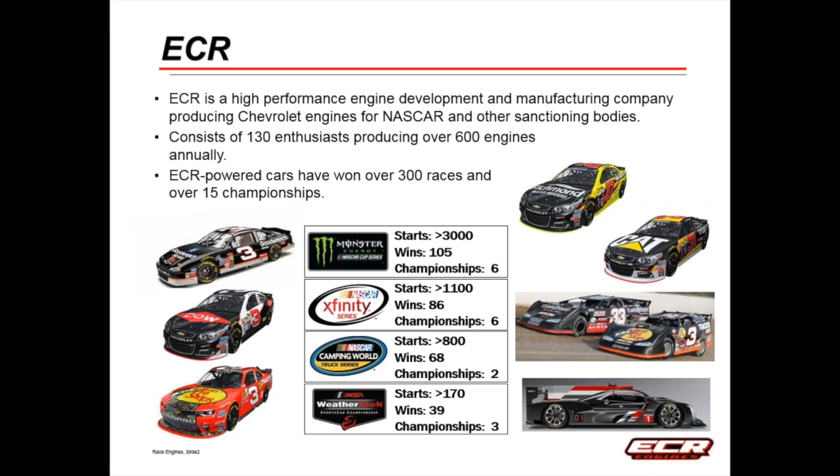Been doing this for a long time. Those of you who have been around for a while, which isn't very many of you, our claim to fame up in RCR was back in Dale Earnhardt's days and bringing him through his years of success in NASCAR. And since then, we've had the pleasure and honor of working with many other drivers.

So most of what we're going to talk about today, engine-wise, is information that comes from a Cup engine. A NASCAR Cup engine has its roots many, many years ago, back actually to the small block engines of the 1960s. These are V8 engines that are 350 to 358 cubic inches, which is 5.8 liters. I put the word stock in parentheses because presumably by rules, the engine is a stock cast iron block and aluminum cylinder heads.

But we have done this exercise a number of times over the years where we look over the parts list for our engines, which consists now of over 4,000 parts if you count all bolts and washers, hoping to see if we had one part that actually would qualify as stock, and so far we haven't been able to find one. So there are no parts on these engines that are actually parts that are on automotive engines that you would buy at a dealer.

Nevertheless, the architecture as far as the displacement and the bore spacing and things like that are representative. Compression ratio is limited in the rules. It's a fairly archaic architecture. I don't know, how many of you are engine people in the room or kind of know engines? Okay, well, this is good. Okay, so I'm not speaking in a foreign language up here on a lot of this. A push rod 2-valve per cylinder valve train, that's a pretty old archaic architecture.

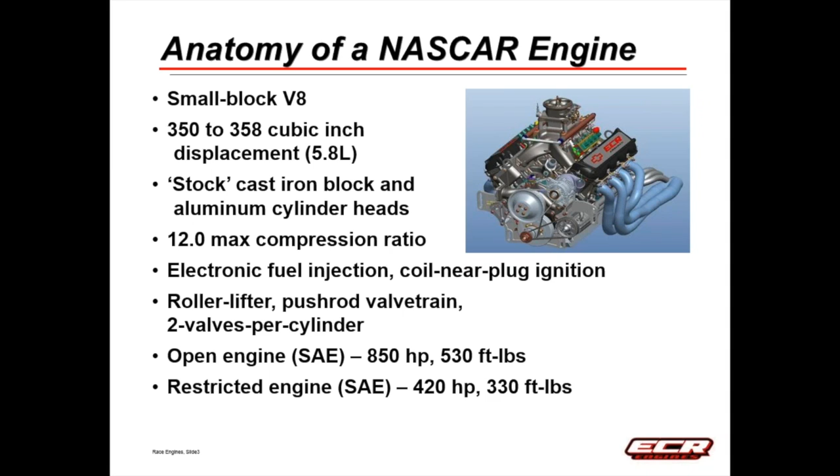Restricted engines for super speedways, that's one of the more restricted venues that NASCAR puts on us. They put an air restricting device where the air has to pass through 4 holes that are basically about the size of your little finger, and that reduces the power down to only around 420 horsepower. That's for super speedways like Daytona and Talladega, where even at that power level, average speed over a lap will still exceed 200 miles an hour. If we were to go there with the unrestricted engines, average speeds would exceed 240 miles an hour, and at some point it just gets a little ridiculous and a little dangerous. So they try to keep the speeds closer to 200 miles an hour.

So what in the world is the difference between a race engine and a production engine? I said architecturally they're similar, but the development philosophy that you use to create them is much different. In the production engine world, there are a number of criteria that you have to work around, all of which are weighted similarly. Obviously, the engine has to last, in the course of a production engine, has to last 150,000, 200,000 miles. It has to make the power you want. Fuel economy is always a concern. Drivability, noise. You have to worry about emission standards. It has to fit in the car.

You have to be able to afford it. You have to be able to make it. A production LT1 engine, which mimics what our engines are as far as bore sizes and displacement, makes around 460 horsepower and 465 foot-pounds.

In racing, we have a different set of requirements. Number one is reliability and durability, because of course you have to finish if you want to win. But our reliability or durability target is race distance plus 1 mile. So in the case of a 500-mile race at Charlotte, our goal would be to produce something that lasts for 501 miles. If it lasts for 510 miles, you've probably over-designed some components and are giving up some power. If it lasts for 490, you had a very bad miscalculation, and need to work a little harder next time.

Power curve, of course, is of ultimate importance. Fuel economy, don't worry about it so much, we'll figure out a way to make it fit. These engines cost a fortune and take forever to make. So the criteria gets less and less stringent with race engines once you get past the requirement that it has to last for race distance plus 1 mile and make a lot of power.

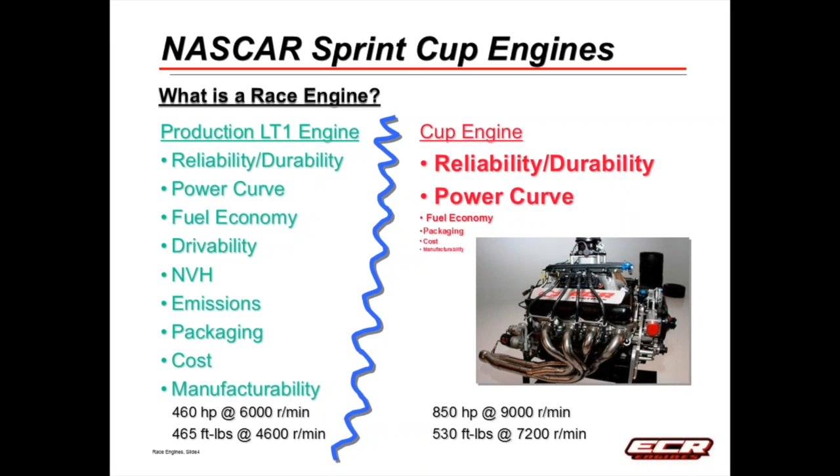In order to do that, these engines are stressed pretty heavily. They're highly stressed to produce the output they do, and to produce that output it's highly dependent on favorable fuel and lubricant properties. Now let me show you a little video here.

This is one thing that I wasn't sure how to do remotely, so we'll try it this way. Well, that didn't work either. Let's try it this way.

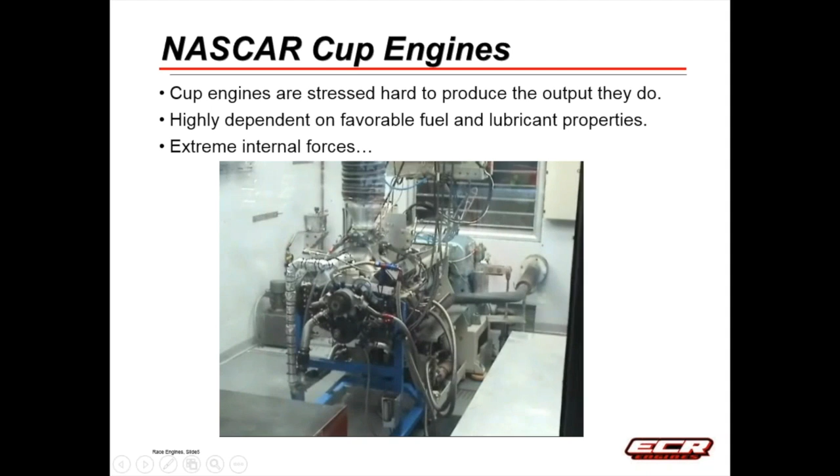We're at 333 degrees cooling out, 116 psi in the block, and 105 in the tank. Whoa! Okay, so that one didn't make it to race distance plus 1 mile. But that illustrates for you the amount of force that's in these engines and what's going on when they run. When they don't make it, the results can be pretty spectacular and depressing if it's your engine.

For fuel history of NASCAR, for many years NASCAR spec fuel was a leaded aviation fuel, 112 octane. This went all the way up to 2008, long after leaded fuel was gone from the automotive world. The reason we retained it in NASCAR was we just needed the octane, and lead was an excellent source of octane. But it was always a little scary because we're intimately in contact with the fuel all the time. We're breathing it, getting it all over our skin, wearing it, swimming in it. Knowing that we were working with something that is a known blood toxin poison wasn't that comforting.

So it was nice in 2008 when NASCAR finally adopted an unleaded fuel. However, in order to get the octane we required, we had to use over 40% aromatic concentration in the fuel. Aromatics are benzenes, toluenes, and most of the aromatic constituents are known carcinogens. So what we did was just change the way we were going to die, from lead poisoning to cancer. Still not comforting, but we did with it what we could.

Then in 2011, NASCAR changed to an E15 fuel. The nice thing about that is ethanol inherently has a very high octane, something we'll talk about later. That allowed us to displace over half of the aromatics in the fuel with ethanol, a much safer additive, and that's what we've been racing ever since. E15 is 15% ethanol. If we could increase the ethanol concentration to 30%, we would be able to eliminate the aromatics altogether, which is certainly something I hope happens in the not too distant future.

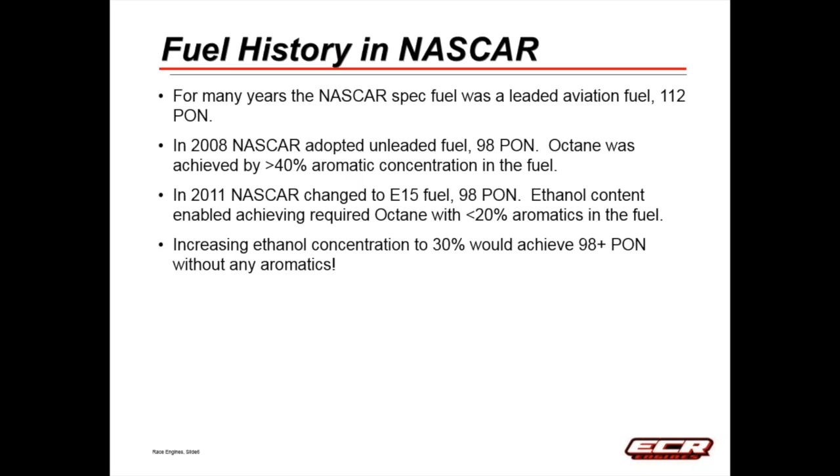So what really is an engine? An engine is simply an energy conversion device. You're taking fuel, the chemical energy in fuel, and passing it through this energy conversion device that translates that to mechanical energy at the wheels which propel your vehicle.

In the case of a NASCAR engine, we put about 2,430 horsepower into the engine in the form of chemical energy. We pass it through this energy conversion device where we have thermal efficiency, volumetric efficiency, and mechanical efficiency associated, and we get about 850 horsepower out the other end. This horse here is looking concerned and a little confused because he expected a lot more than 850 of his friends when he considered that he put 2,430 in. But that's actually pretty good efficiency for an internal combustion spark ignition engine. That's what we're dealing with, and it's depressing on the surface to know that we're that inefficient in transferring chemical energy to mechanical energy.

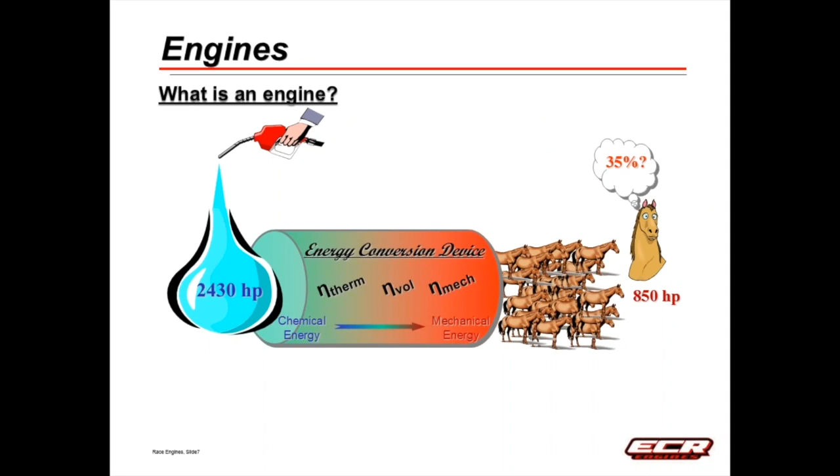On the bright side, that means there's plenty of room for innovation. Hopefully someday many of you in this room will contribute to making it so that to get this amount of power out, you put less in, or if you put this much in, you get significantly more power out.

Now let's concentrate more on the fuel, because that's the input to this whole process, what drives these engines. I know many of you know engines and chemistry, so a lot of this may be rudimentary.

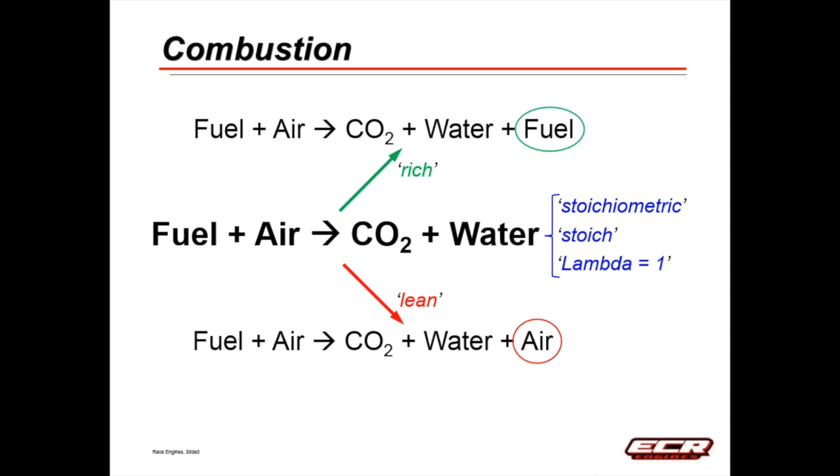Let's look at the difference between ethanol and gasoline. Ethanol, shown on top, has just two carbon atoms with a hydroxyl radical attached. This is a stoichiometric reaction, and these ratios are very important. Every ratio here is favorable from a combustion or environmental perspective relative to gasoline. Ethanol's hydrogen-carbon ratio has three times more hydrogen atoms than carbon atoms, and its oxygen-carbon ratio is a half. The research octane number of ethanol is around 109.

The heat of vaporization of ethanol is around 110 kilojoules per kilogram of air. We'll go over each of these individually in a minute. Comparing to gasoline, the hydrogen-carbon ratio is around 1.8, there is no oxygen attached to gasoline, the octane number is around 93, and the heat of vaporization is about 40.

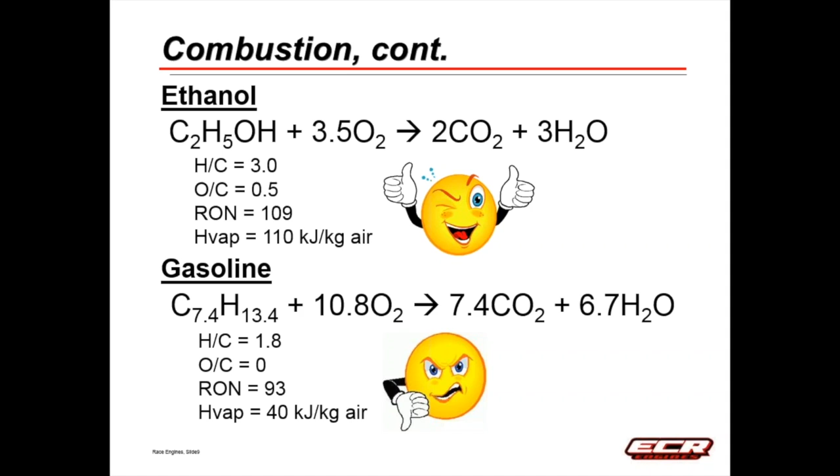Now I want to go through each of these parameters individually and explain how ethanol and gasoline differ, and how those differences generally work in your favor. The first is the hydrogen-to-carbon and oxygen-to-carbon ratios. The more hydrogen you have relative to carbon, the cleaner it burns—hydrogen burns very cleanly, and the products of combustion of hydrogen and oxygen are water, which is a pretty clean reaction.

Having some oxygen bound to the fuel—this relates to the oxygen-to-carbon ratio—increases the oxidation efficiency. So when you blend gasoline with ethanol, that reduces carbon monoxide and unburned hydrocarbon emissions, because you have that oxygen atom that's part of the fuel.

Let's burn a couple of things so you get a vivid description of what I'm talking about. What I have here is Sunoco gasoline—actually premium gasoline without any ethanol in it. I'll pour a little bit on here, hopefully not spilling it on the floor... spilled some on the table. The object is not to burn the building down.

So there's how gasoline burns. You can see the carbon coming up. If I hold this right over here for a bit, you can see the carbon emissions coming off the combustion. What's happening is carbon that's not finding oxygen is being emitted as soot. There's no oxygen in the fuel, so this is purely a diffusion flame, where the fuel has to evaporate and meet with air coming down from the environment. Let's put this one out.

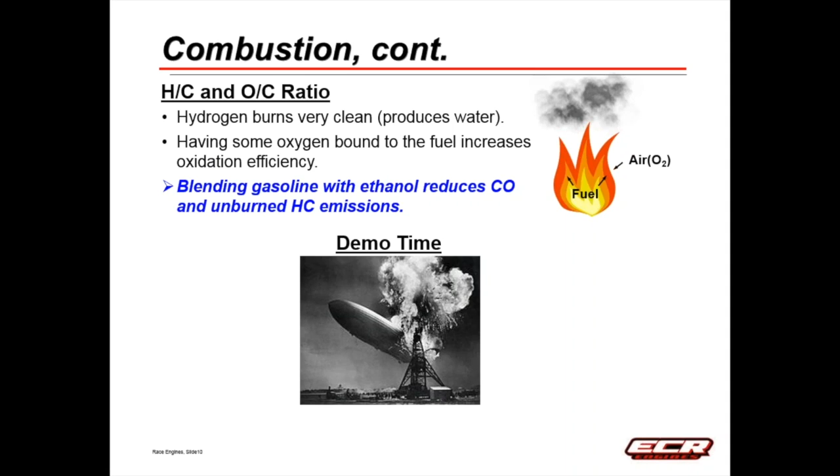Okay, so let's move on to the next property. I'm going to spend a little bit of time talking about this one. This is the octane difference between ethanol and gasoline. As we mentioned before, in the slide where we compared the chemistry of the two, remember the research octane number of ethanol was around 109 and gasoline was around 93 or so.

Knock refers to the sound that results from spontaneous ignition of the air-fuel mixture ahead of the normal propagating flame, and the subsequent cylinder pressure oscillations that occur. Knock typically occurs near the end of the combustion event and is characterized by rapid fluctuations in cylinder pressure and a distinctive pinging sound. Now you don't hear that too much on modern cars anymore because they have accelerometers mounted on the side of the engine.

Once they start to knock, it starts retarding the spark and makes calibration changes so that you don't hear it anymore, but you're degrading the efficiency in order to keep it from doing that. Power can actually increase with knock because the end of the air-fuel mixture burns nearer to TDC.

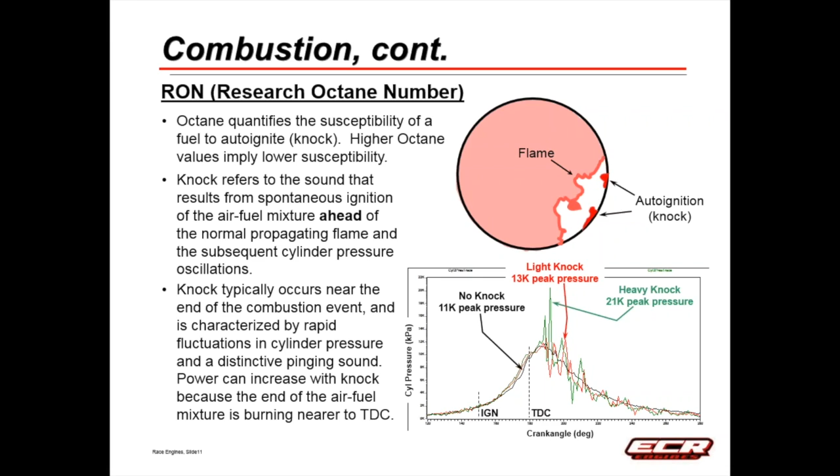The green curve has very heavy knock. You can see it ringing, and the initial knock pressure peak here is almost double the peak pressure of what the engine was generating without the knock. Too much of that and you will be walking very soon, because that's generating pressures and temperatures which are not what the engine was designed to handle.

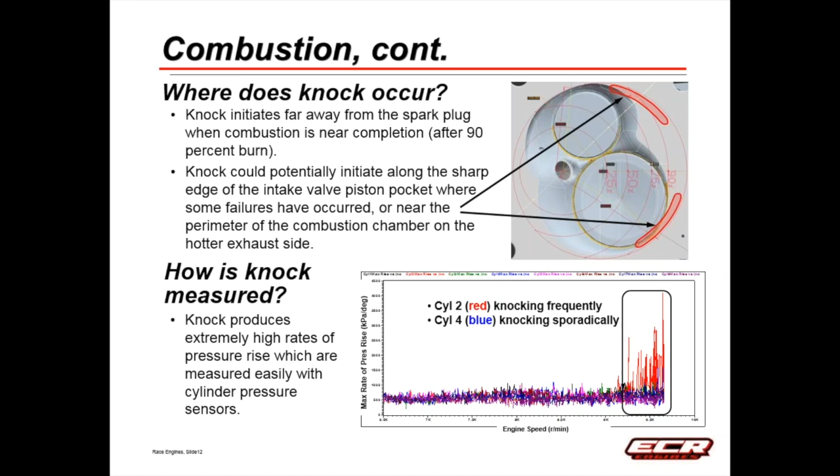Knock is measured by a cylinder pressure sensor looking at rates of pressure rise. When knock happens, the pressure rises very, very quickly. So this is looking at rate of pressure rise versus engine speed in a sweep, going from 6,500 RPM up to 10,000 RPM, with all 8 cylinders of the engine plotted. You see the red here, which is cylinder 2, with rates of pressure rise going from 500 to several thousand, indicating that we have extreme knock going on in that case.

When you take apart an engine that's knocked or that's failed and you wonder if knock had anything to do with it, normally the telltale signs are you'll see on the edge of the piston, far away from the spark plug, you'll see actually some material pitted out on the edges.

Now, when does knock occur? Well, knock occurs when the integral of temperature times time of the air-fuel mixture is high. So that's why it's the part farthest away from the spark, because that's the last part that gets burned, so that's the time. The temperature part is if you're at a high load, if your compression ratio is high, you have things here that encourage knock.

High compression ratio, low engine speed. That means you have more physical time from when the spark is discharged. Temperatures are high. Charge dilution is low. Air is dry and dense, so you don't have moisture. A lot of deposits, high amount of spark advance. Compression ratio high. This is the big one.

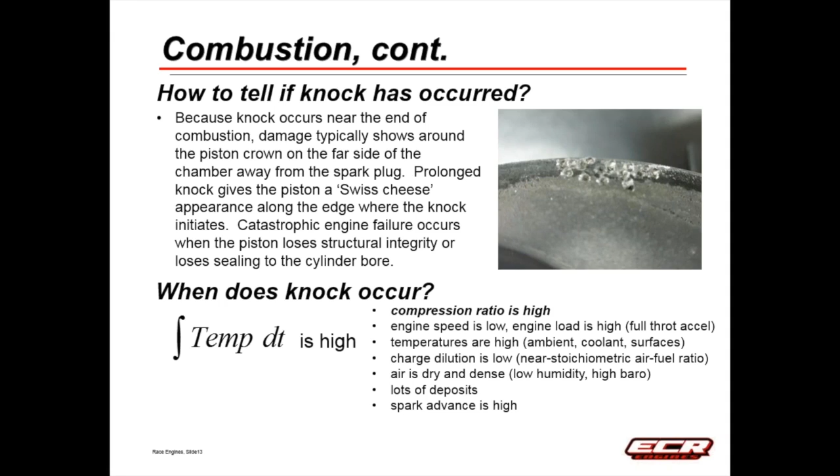Those of you who have been through engine courses, I'm sure one of the first things you learn is engine efficiency, at least ideally, is directly proportional to compression ratio. If you want to get better fuel economy, one of the first things you need to do is increase the compression ratio of your engine. So here's a formula for ideal.

At 10 to 1 compression ratio, you get about 50% efficiency from this equation. At 13 to 1, you get about 54% efficiency. You say, well, that's only 4 points. Well, you take the ratio of the two, and it's closer to 10% gain in thermal efficiency, which is a strong gain. So therefore, octane limits the efficiency potential of engines through the ability to implement a high compression ratio.

Ethanol is the safest, least expensive octane booster. We said before, if you could have 109 octane fuel, you could have extremely high compression ratio in engines and knock would not be an issue.

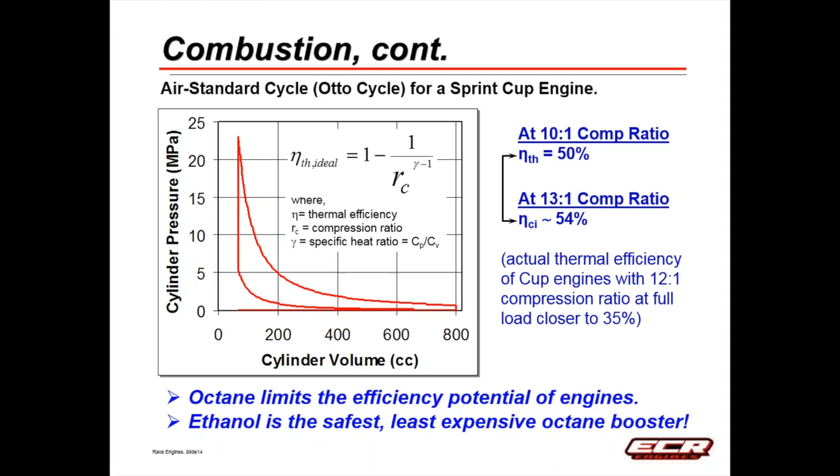Next, I want to talk a little bit about heat of vaporization. Heat of vaporization is the amount of energy required to convert a substance from liquid to gaseous phase. I better cover this up before it all evaporates away. If you take some of this and pour it on the back of your hand, and then blow on the back of your hand, when it vaporizes, you'll feel your hand get very, very cool. That's the heat of vaporization at work there.

And the heat of vaporization of ethanol is almost 3 times the heat of vaporization of gasoline. Fuel vaporization is beneficial in engines because it cools the incoming charge, analogous to running on a much colder day. So the more ethanol that you inject into the mixture, as it evaporates, it cools the air and fuel mixture coming in. And once again, that's going to help you from an efficiency standpoint, and it's also going to help you from a knock or compression ratio standpoint because you're starting with a cooler mixture.

So like I said, ethanol has nearly 3 times the heat of vaporization of gasoline, providing greater cooling and enhancing the already excellent octane characteristics. Octane ratings are done at a fixed inlet charge temperature. So when fuels are rated, the rating process that the government uses a fixed temperature of the air-fuel mixture going in, so therefore you don't get to take advantage of the characteristics of ethanol in that octane rating.

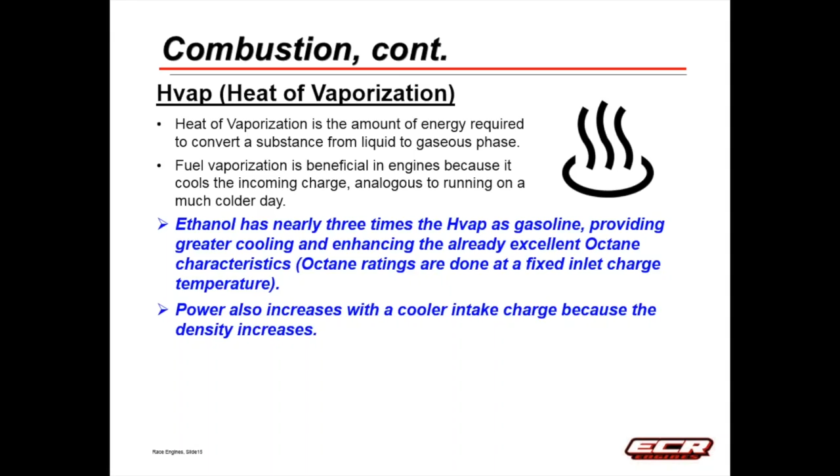Power also increases with a cooler intake charge because the density increases. If you want your car to go faster and have more fun, then you want to get out on a nice, cool, dry day. So summarizing ethanol combustion, high hydrogen content and entrained oxygen reduce unburned hydrocarbon and partially oxidized carbon emissions relative to gasoline. Once again, that's the hydrogen and the oxygen.

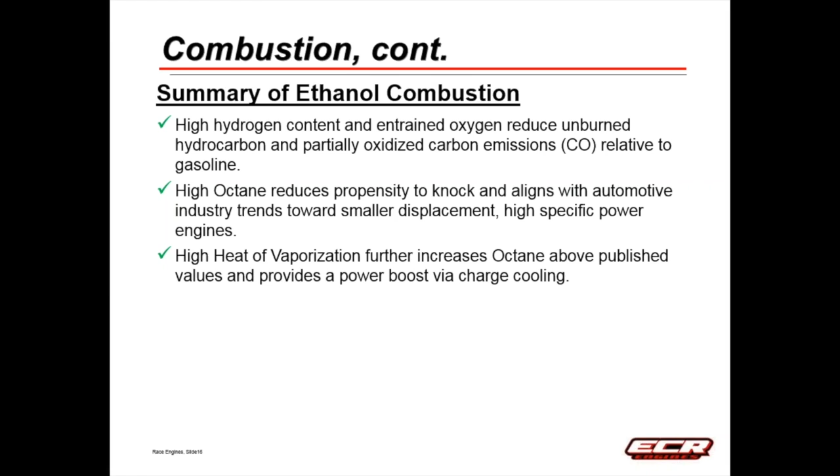High octane reduces propensity to knock and aligns with automotive industry trends towards smaller displacement, high specific power engines. You see V8s going away, being replaced by V6s that are twin turbocharged or boosted in some way. In order to accommodate those high specific power engines, that's where you need the octane. High heat of vaporization further increases octane above published values and provides a power boost via charge cooling. So those are all nice benefits, good advantages.

You will often hear disadvantages of ethanol as well. So let's go ahead and review those and see what's real and what's imaginary. What we're going to talk about are the heating value of ethanol relative to gasoline, corporate average fuel economy standards and what it requires to meet those, the hygroscopic nature of ethanol, and finally the stoichiometry of ethanol versus gasoline and how that applies to boats and lawnmowers and weed whackers and things like that.

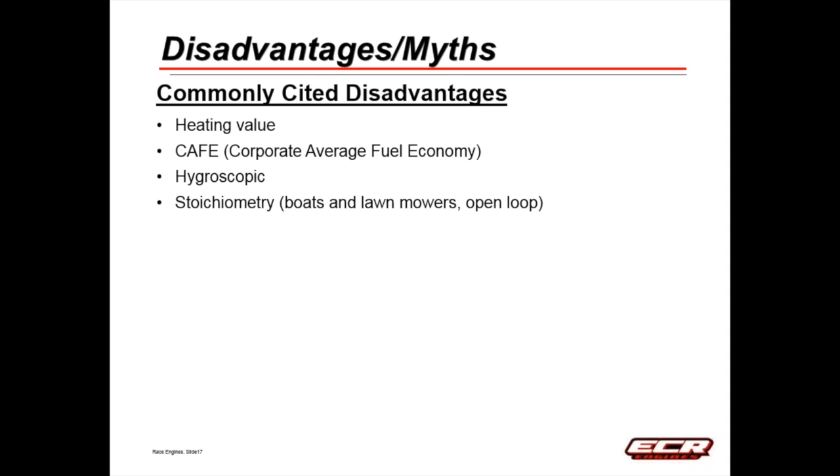So let's start talking first with heating value. Lower heating value of gasoline is about 116,000 BTUs per gallon. I know nobody uses BTUs anymore, but NASCAR still uses BTUs. So lower heating value of ethanol is about 76,000 BTUs per gallon. It's 34% less energy in a gallon of ethanol than there is in gasoline.

So all else being equal, pure ethanol would produce 34% less fuel economy than pure gasoline because of the heating value reduction. That is if you were running on pure ethanol versus pure gasoline. Sometimes you'll hear people say, oh, well, I don't want ethanol in my fuel because ethanol is 30% worse fuel mileage. Well, if it was pure ethanol, that would be true. However, E10 is what's commonly available in the pumps, so that's 10% ethanol. So now instead of 34%, you're talking about 3.4%.

At E15, you're talking about a 5.1% energy reduction using an E15 gasoline blend as opposed to pure gasoline. So typical E10 gasoline does have about 3.4% less energy content than ethanol-free gasoline. However, E10 gasoline costs 20 to 40% less than ethanol-free gasoline. E15 gasoline costs yet another 3 to 5% less than E10 gasoline.

So if I'm going in there and I have the opportunity to buy E10 or E15, which a number of stations in North Carolina do, if I can save 3 to 5% in costs for a 1.7% delta in energy, once again, what I'm listening to is my wallet, and my wallet says that's the right thing to do. Ethanol blended gasoline is a bargain on a miles per dollar basis.

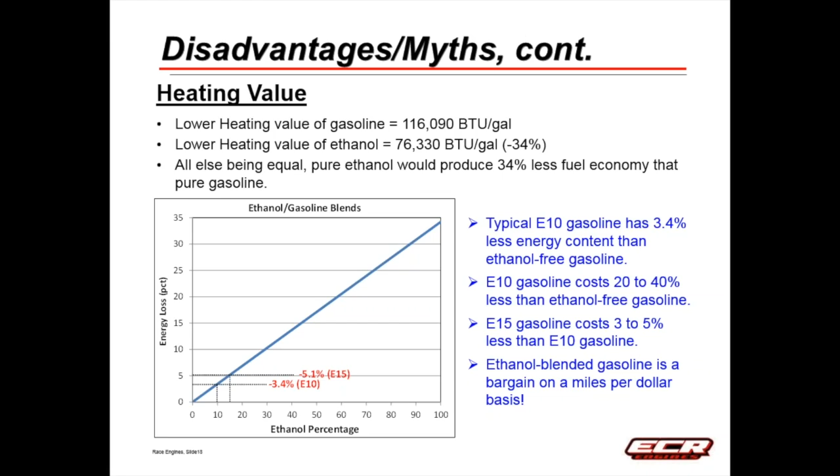Next one is CAFE, corporate average fuel economy. Current regulations require a fleet average of 37.5 miles per gallon for each manufacturer in 2017, increasing to 54.5 miles a gallon in 2025. President Trump has postponed the 2025 requirement pending further study because some reality set in there that that's going to be virtually impossible to do.

Regulating automotive efficiency by volumetric consumption is a really bad idea. It works against the ethanol industry, but it's just not a good idea, and I'll explain why here. Ethanol is a renewable resource. It's domestically sourced. It's inexpensive, as we just talked about relative to gasoline. It's secure. It's clean. It's efficient. It gives us a way to be in control of our own energy destiny as a country. The one thing ethanol is not is consistent with reduced volumetric consumption.

So like we talked about, you can use ethanol to increase your octane, allow you to get higher compression ratios, allow you to get higher efficiency measured as energy out versus energy in. But from a volumetric standpoint, that's the one place where ethanol loses some of its favorability.

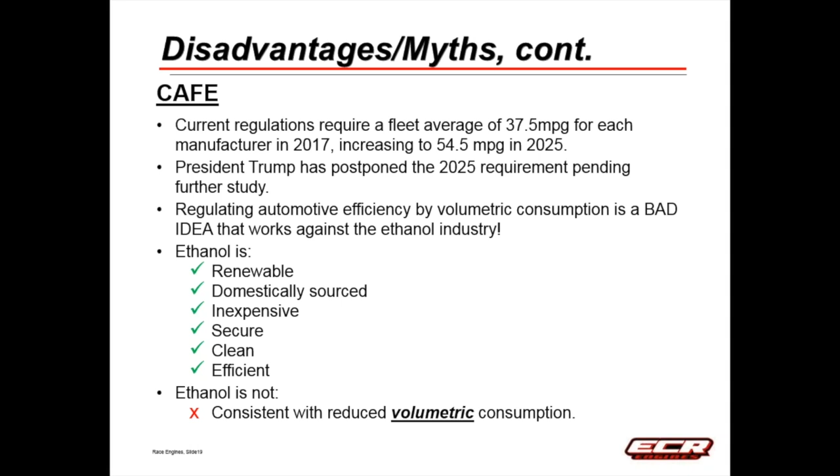So fuel energy content is decreasing as you're increasing that ethanol. So you've got an energy content reduction in percent, but you've got an efficiency increase in percent. And depending on how those balance out, in all cases you're going to be more efficient from a thermal efficiency standpoint, but from a volumetric fuel standpoint, you might not be. Fuel economy in miles per gallon improves only if efficiency gains are greater than energy content losses.

Ethanol is a great fuel, but our current CAFE philosophy does not reflect many or virtually all of the benefits. Other efficiency metrics, such as CO2 emissions, make much more sense if the objective is to have the government encourage consumers and the automotive industry to produce more efficient engines.

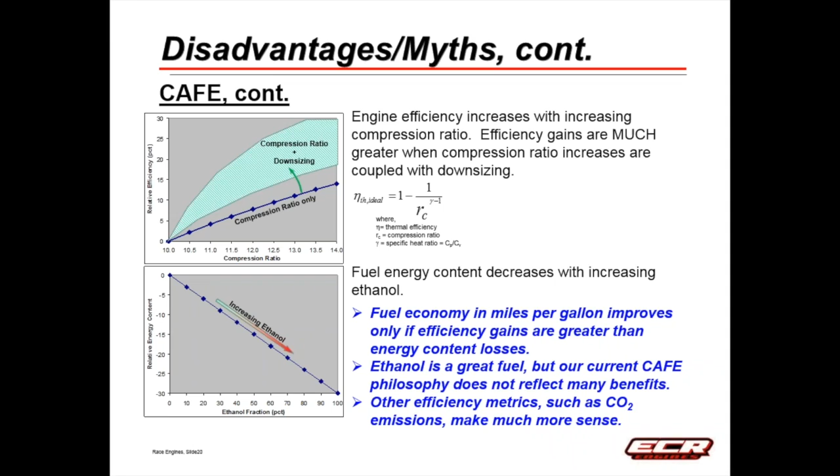There are certainly plenty of examples around the world, and I think most countries around the world regulate engine efficiency off of CO2 emissions and not off of a fuel economy miles per gallon number. Switching to a system like this would make ethanol very, very much more favorable for manufacturers than our current laws do. Let's watch a couple more videos here.

This has to do with hygroscopic. Water is not soluble in gasoline. Small amounts of water also are soluble in ethanol gasoline blends. Is this a problem? Some people would like you to believe it is. In my opinion, water solubility is an advantage. Let me show you a couple of videos, easy little experiments here.

This is a beaker that has a little over 1,200 cc's E15 fuel directly out of our fuel tank. Should be dry. We're going to go ahead and add 9 cc's of water to it. The 9 cc's of water represents 0.75% water concentration. You can see as we add the water, it goes right to the bottom of the beaker. It doesn't immediately mix in with the fuel. But if you look real closely, you'll see where the water is starting to soak in with the fuel at the bottom.

Now what we're going to do is we're going to take this beaker off of here. I'm going to leave you for a minute. I'll come back when we're ready to stir the water in. Here we are with the water in the beaker, 0.75%. We're going to go ahead and stir it up now.

It's not that easy to get it into solution. You've got to stir pretty good. But you can see as it keeps on stirring, the fuel starts to look like it's getting a little bit opaque, but then it clears up again, and voila, all the water has gone into solution. That's 0.75% water. Okay, so that's what happens when you do that experiment on a E15 mixture.

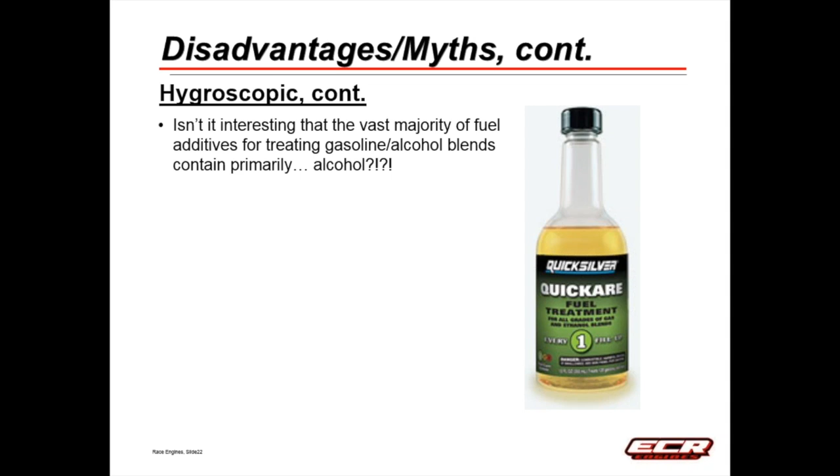So, finally, let's talk a little bit about stoichiometry and as it applies to small engines. Recall that combustion chemistry of gasoline and ethanol differ. The stoichiometric air-fuel ratios are as follows. Gasoline at 14.7, that means it takes about 14.7 pounds of air per pound of fuel to have the perfect mix of air and fuel in gasoline. For ethanol, that reduces to around 9.0. That implies that E10 is around 14.1, E15 is around 13.8.

Passenger cars and trucks and large inboard boat engines operate in closed loop, where an oxygen sensor automatically adjusts the air-fuel ratio for optimum operation. So the fact that you require for optimum operation a different amount of air relative to the amount of fuel as you change the percentage of ethanol is compensated for automatically in the control system of those engines.

Many outboard engines and lawn engines, mowers, chainsaws, weed whackers, etc., do not have oxygen sensors and thus operate in an open loop mode with a fixed ratio of air to fuel. So they either have a carburetor or maybe in some cases a fuel injector, but the calibration is fixed and cannot compensate for changes in the percentage of ethanol. So as you increase the amount of ethanol in the fuel, you're getting away from what would be an optimal mixture in those devices.

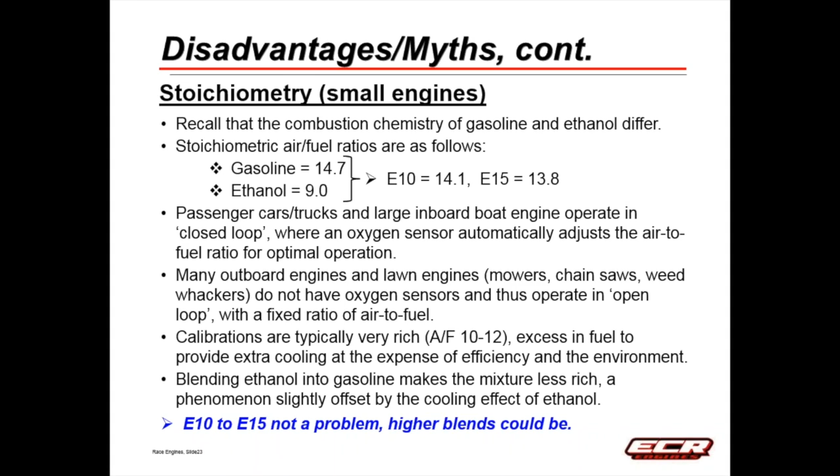Blending ethanol into the gasoline makes the mixture less rich. However, that's slightly offset by the cooling effect of ethanol we talked about. The bottom line is E10 to E15 is not a problem in these small engines. However, if you put enough ethanol in the fuel to get to stoichiometric or lean stoichiometric, there is a potential issue. So I wouldn't recommend running E85 in your lawnmower, but a normal E10 blend will not cause you any issues.

Let's summarize our discussion of disadvantages and myths and whether they're really disadvantages. First: the heating value of ethanol is less than gasoline, resulting in lower miles per gallon with ethanol gasoline blends. That's true, but the cost of the fuel drops much faster than the fuel mileage, making ethanol gasoline blends a bargain from a miles per dollar perspective. Fuel mileage impacts at typical blend rates are very small. So the statement is correct, but I don't consider it a disadvantage—I consider it an advantage when you talk about the economics.

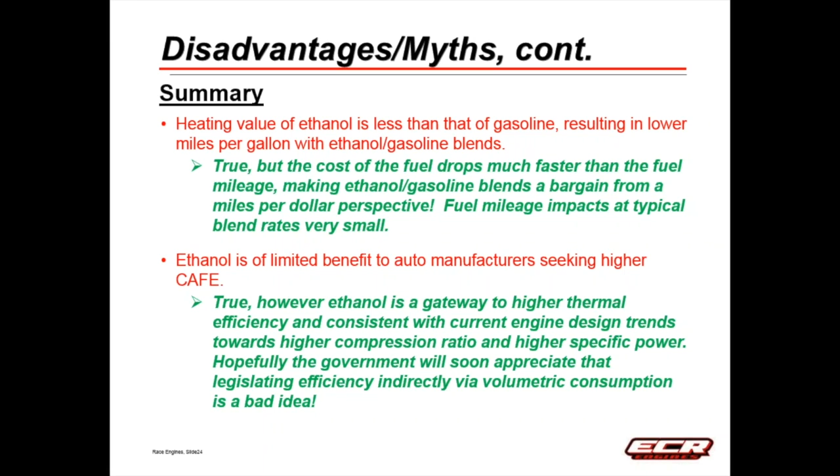Next, ethanol is of limited benefit to automotive manufacturers seeking higher CAFE. That's also true. However, ethanol is a gateway to higher thermal efficiency and is consistent with current engine design trends toward higher compression ratio and higher specific power. Hopefully the government will soon appreciate that. Legislating efficiency indirectly via volumetric consumption is a bad idea.

Next, ethanol absorbs water and harms boat engines. I disagree with that. It does absorb a little water, but any water in the fuel system is an issue for boaters operating on pure gasoline—any water, even a drop. Ethanol provides some relief. There is a point at which you exceed the solubility limit, but it does provide some safety factor.

Ethanol ruins small engines—disagree with that too. Small engines are calibrated extremely rich so the fuel can aid with cooling. Ethanol reduces the amount of excess fuel but also provides enhanced cooling through increased heat of vaporization. E10 to E15 blends have very little net effect on small engine reliability.

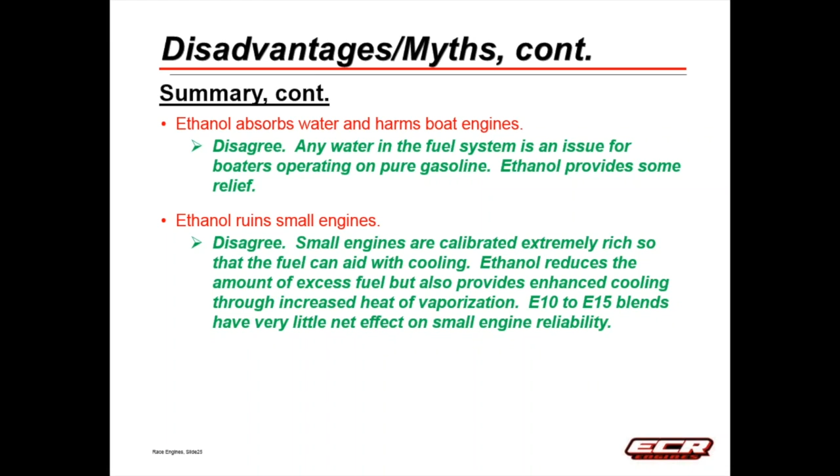So that's kind of the summary of things you might hear said about ethanol and what the facts are, as opposed to the statements. I want to circle around now and go back to NASCAR a little bit—what our observations have been.

We adopted ethanol fuel E15 in 2011. The conversion to the new fuel was seamless. We didn't make any design modifications to the engine. The engine power increased slightly, that's from the cooling effect of the ethanol. Spark timing and burn rates were not affected. Post-race piston hardness increased, because the E15 fuel provided more cooling than previous fuels without ethanol.

Deposit buildup reduced. Deposit buildup is carbon that hasn't been oxidized, and as we saw in our example, ethanol does a great job of helping oxidize carbon deposits and reducing their buildup in the engines. Over 11 million miles now accrued in race conditions in NASCAR with zero mechanical issues attributed to E15. Tests with up to 30% ethanol have been performed without incident. Hopefully this is coming soon.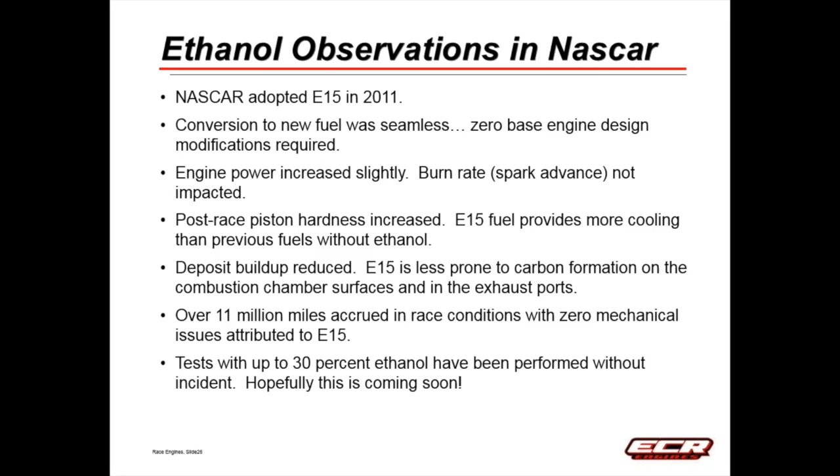Ethanol is a great engine fuel. It is renewable, inexpensive, secure, and clean. All of you become advocates—fight myths with facts, you lay it out. There are some disadvantages, there's a lot of advantages. I'm pretty sure that anybody who really sits back and looks at it from a scientific basis and weighs the advantages against the disadvantages will come to the same conclusion: that ethanol is a great, great fuel. It's good for the consumer, it's good for our country. As we talked about a few times, listen to your wallet, and it will tell you that's the direction you want to go as well. Thank you for your attention, and I'd be happy to entertain any questions.

So what's the overall goal of moving from up to 10% ethanol content to an E15? Well, that's just the first step, hopefully, of many to come.

I think ethanol production is actually pretty efficient as far as utilizing corn to make ethanol. That's another myth I should have talked about. People make comments about the price of corn being impacted, and using your food supply to create fuel. The corn used to make ethanol is feed corn, it's cattle corn, not the sweet corn that you eat.